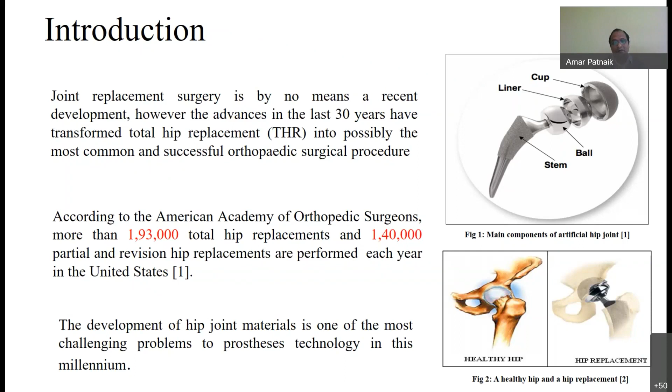So we'll see how it works, and what exactly the biomaterials are and where it started. It is not specific to some area like mechanical or medical science only. It's all sciences, arts, commerce - everything is under these groups only.

So we are saying that in 1987 there were a few pioneers, Williams, who first developed medical devices through this. It was not developed effectively previously. It was developed, but effective results came during that period. Because of that, we can say the effective period of analysis of biomaterial is from 1987.

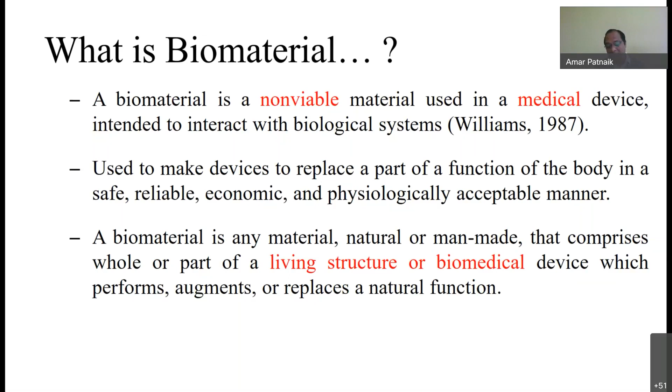And the main problem with biomaterials is material failures. Prior to that, some natural and man-made materials were used as artificial replacement materials in the human body, or even in animals.

So for any biomaterial we use, we need to study a few things first. Otherwise we can't use it directly in the body or in direct applications, whether human or animal. So prosthetic replacement is feasible in both humans as well as animals. Research is going on for both.

In India also, both are being done. It's not only human being replacement, it's also replacement in animals. Sometimes we are doing animals depending upon how our cultures affect this - we are least bothered about animals, so there is less replacement there, but for human beings, replacement is a major growing area. Near my MNIT, there is a big production house, a private laboratory, and they are developing biomaterials through polymers only.

So however the biomaterial is developed, we need to study its compatibility first, whether it is biocompatible or not. That is the first analysis.

So while studying biomaterials, I will show you how people study it by putting the developed material into an animal's body and testing the compatibility, and you can study both through equipment also. But biocompatibility generally depends on the type of material and the type of stresses also.

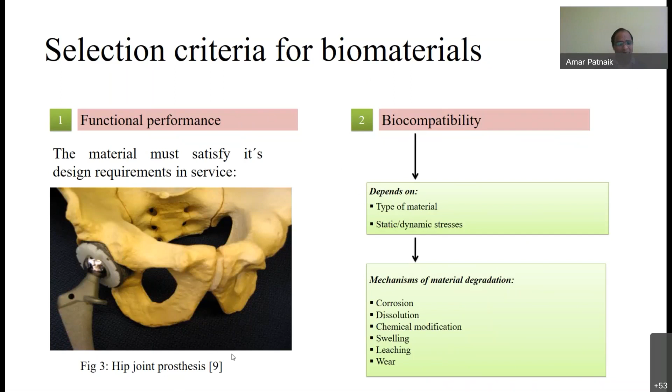The rest we have not covered, it's not our area of research. So the prosthetic material, the developed artificial part - any part can be replaced, and people are studying this, but our part is only the liner part. So exactly the area of research going on in the present day is all this.

Depending upon the situation, we use the materials - either metals, or metals and alloys, or ceramics and also polymers. So in metals, the use is moderate, because its application is neither weaker nor stronger material - it is in between polymer and ceramics.

So the basic biometals being used are cobalt-based alloys as the basic one, and titanium and its alloys. Stainless steel is the oldest fashion that people are using. As far as ceramics, alumina, zirconia, bioglass and glass ceramics, calcium phosphate ceramics - it is a group. And as far as polymer is concerned, UHMWPE, ultra high molecular weight polyethylene, is the one measured for use.

Most medical applications use this material - UHMWPE - as a membrane material also, sometimes as a cork material also, sometimes as a liner material also.

The behavior is like metals only. So as far as application point of view, it is good and a corrosion resisting material.

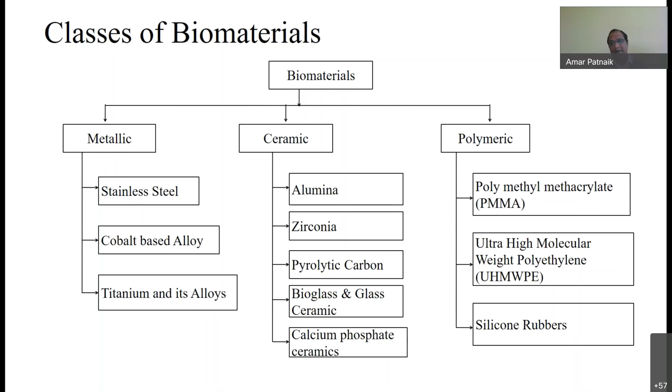Before going to our results, some basic things we want to refresh. So the people working on this are material scientists, biomedical specialists, pathologists, and clinicians, all working on this particular area of biomaterials.

One example I want to mention is AIIMS Delhi. They proved that whatever biometals we are using, it has side effects. This article is available online on the AIIMS website.

So it means there are still some defects, or you can say casting defects, or side effects. A major side effect is cancer. That is the major side effect.

Other side effects we can measure and manage. But cancer has one of the highest degrees of severity, even more than COVID disease.

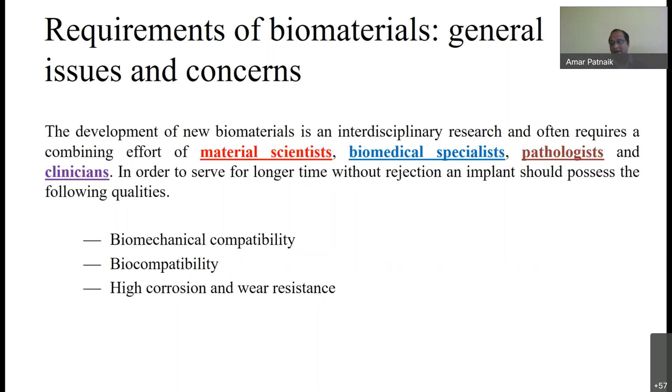Research started around 1938, and the first biomaterial used was M on M, that is metal on metal, a stainless steel cup with a head. As I said, there is a cup, a liner, and a ball. All three are important.

If any component fails, it is the biggest problem, because a second replacement is tough and tedious for the patient also. So it had some failures, and the cup was fixed using screws, and some heads were used.

We will discuss the demerits again. In 1958, another group discussed metals and polymers, because for all the parts, there's no need to go with metals only. They felt that if one or two parts used a polymer, the weight could be reduced and maybe have some good properties too. It's not a bad thing. Because of that, this partially replaced metals, and they used a polymer.

It is PTFE, that is a polymer. It is very good. And what they observed is that there is rapid wear of the PTFE.

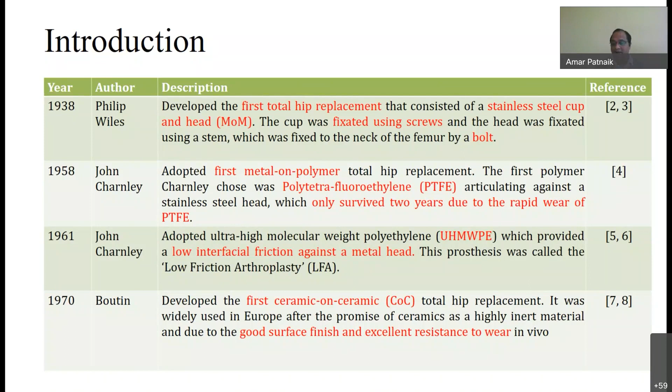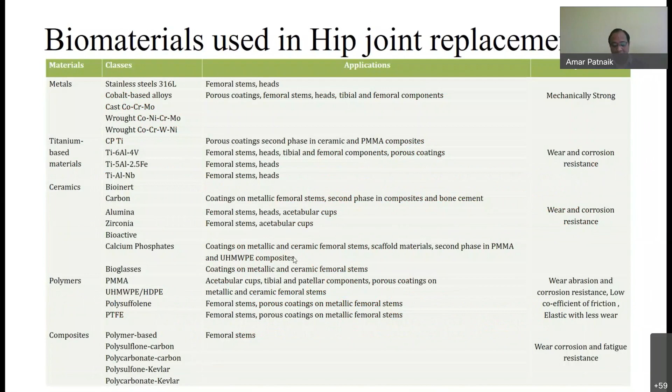So for hip joint replacement, there are a huge number of combinations of materials. I don't want to read all these things, and if possible, I can share the slides, so you people can see them also.

For biomaterials, the main measure of failure is aseptic loosening. Even sportsmen who jump or dance can experience a slip of disc or hip, and these materials are involved. The failure rate measure is around 64%, and the material can have side effects such as infection. Dislocation is also a part of this study.

So the area of research is big, and the area of defect is also big. It's not very small, it's very broad. With 64% failure, you can see how big this problem really is.

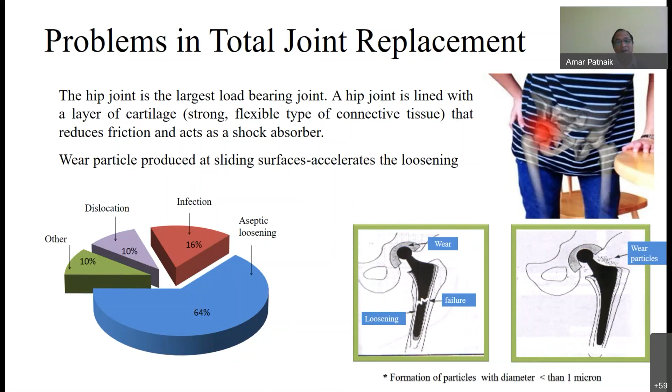People have used different groups of ceramic materials, different series, and every series has some merits and demerits. If I want to use the alumina zirconia series, you can say impact resistance is good, somewhere wear resistance is good, somewhere corrosion resistance is good. You can't get all these properties in a single material. That's why, as a material, it is versatile in character only. We can't get everything in one material.

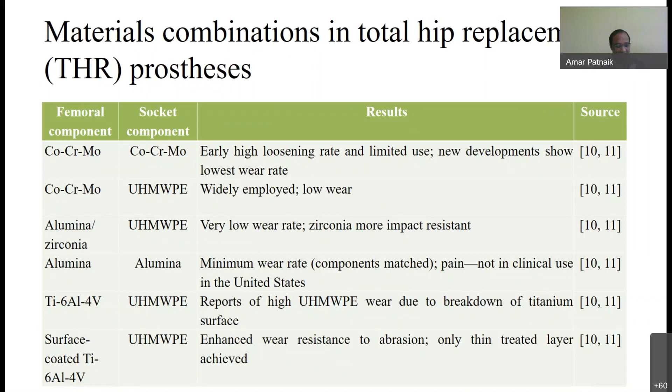If you get all good properties in the same material, then there is no need for further study. That's why every element of the materials has a different role - maybe someone is very good in resistance, someone very good in corrosion resistance, someone very good in wear resistance. So there are different applications for different materials.

So regarding the generations of biomaterials: 1974 was the first generation. Here they calculated less than 100% theoretical density, and what they observed was that the reduction in strength contributed to the earlier failures.

The second generation, in 1992, improved the materials with a finer grain size, because particle size and surface finish directly affect the strength of a particular material. So they shifted from macro to micro, and present day almost all biomaterials researchers are working on nanomaterials only. The effect of size and surface finish is also a major role.

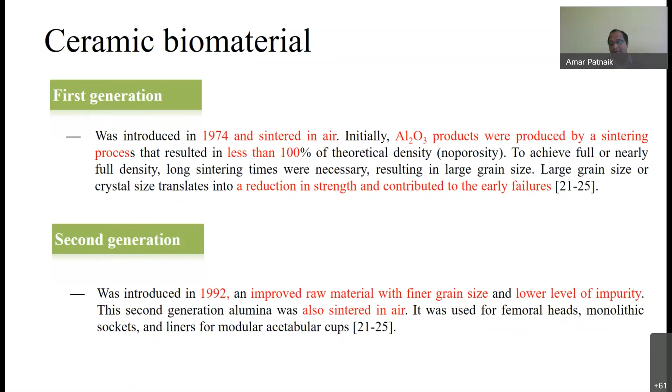That is the second generation. What they observed was that raw material with a finer grain size is required, along with a lower level of impurities - these two things they identified and used.

In the third generation, in 1995, they slightly changed the fabrication technique - using hot isostatic pressing after sintering to reduce grain size. For fabrication techniques, you can go for stir casting, powder metallurgy principles, centrifugal casting, or compression molding. Similarly, hot pressing is another technique, where at controlled pressure and temperature you prepare a specific material. This is one group of research.

That's the generational change - first, second, third. Then in the fourth generation, they identified an alumina matrix composite with 82% alumina, 17% zirconium oxide, 0.3% chromium oxide, and 0.6% strontium oxide. They observed that properties improved compared to the first three generations - hardness improved and wear resistance also improved. By using chromium oxide and strontium, there was enhanced toughness as well as fracture energy. That is the fourth generation's identification.

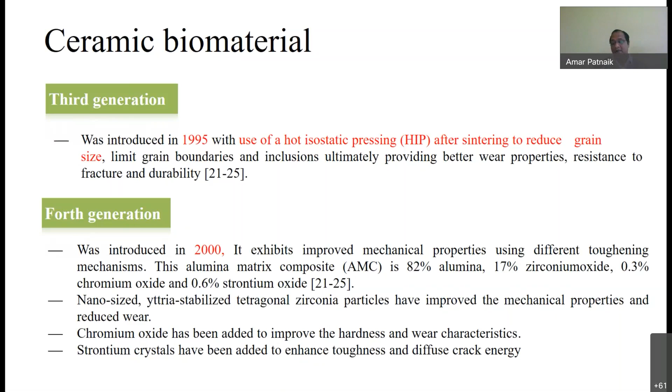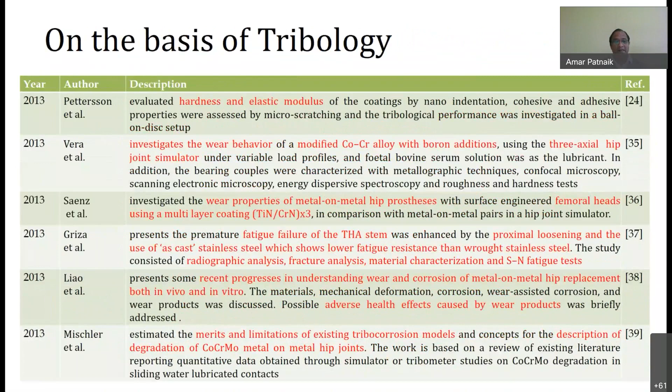So these are the generations. Based on that, people have developed the following materials, and identified different groups of materials. From these three series we have prepared nearly 16 to 17 series. Nearly five students have already completed work on hip prosthetics, and four students have completed work on dental materials.

So we have a huge number of series. This is one of the series, and there are three series we have prepared. The first series is the basic one people have used, that is cobalt, chromium, and molybdenum, with some weight percentages changed as per literature. The second series, we observed that we want to include some nickel. The third series, along with nickel and molybdenum, we have used tungsten also. Then finally, we observed which series gives better results.

So almost all the studies we have observed and studied. So only one series we will discuss.

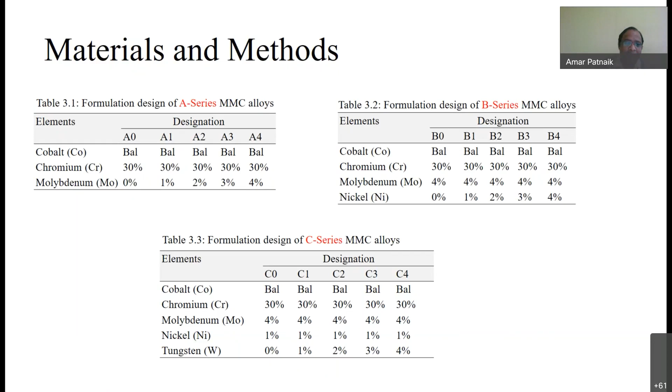This is our biomaterials part, as we have casted using centrifugal casting machines, and this is the grinding and polishing machines. This is the micro hardness machine, and we have scanning electron microscope, XRD, and FESEM. Then pin on disk at high temperature, it is a lab testing equipment at our laboratory. Atomic force microscope is also in our institute, and we also have a corrosion analyzer. Tissue processing we have studied in a different laboratory in MNIT only. So these are the equipments we have used in our work.

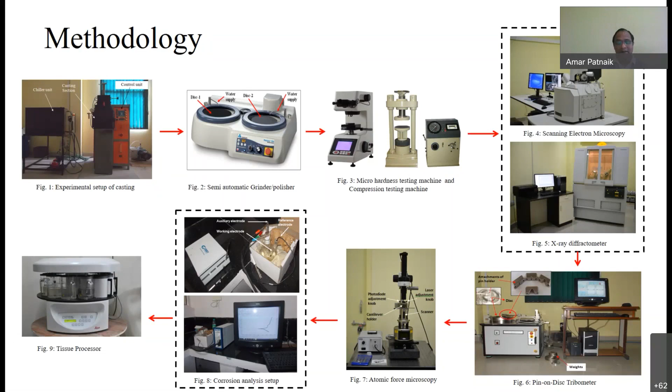So one of the series I want to discuss is, as far as biomaterial is concerned, I want you to think that I want to use my prosthetic material in a particular application. So I need to think about at what velocity that particular person wants to travel, and what is the load of that particular replaced person. So these are the basic boundary conditions. You can go with the load and velocity, distance, as well as the content of the materials.

These four things we have taken into consideration and studied. So load up to 25 newtons, and sliding velocities we have taken from 0.26 to 1.30, and the sliding distance from 500 to 2000 meters.

And after that, you can extrapolate. It's not a big thing - only through machine learning technique, or you can go through GA or through artificial neural network, we can extend that. We can change the data, and we don't necessarily need to do everything through experimental methods only. Some soft computing also can analyze the things very well.

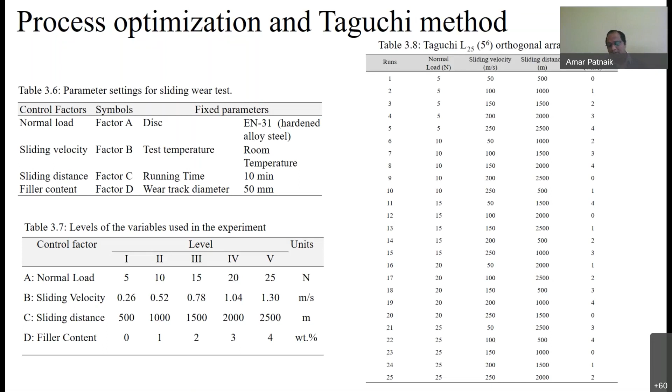So these are a few basic studies we have observed, through XRD as well as its EDX analysis also we have observed. And here the cobalt chromium materials, and molybdenum - this is the series cobalt, chromium, and molybdenum. Molybdenum is a filler material, just 4% we have added, and the rest is all base material, that is cobalt and chromium. Through XRD, what we observed is that there are 5 series of materials present.

So in XRD, we have observed some oxides also, formation of oxides is there. So the formation of oxides - it also indirectly affects the failure of your materials, the oxides. That is also required, meaning to identify whether during casting any oxides are formed or not.

The reason is that if oxides are there, then obviously there is some type of cracks or pores or voids we will observe once it starts working, because a few of the cracks or voids are internal only. We can't see them with our naked eye, even microstructure also we can't see it. But it is invisible like structures are there.

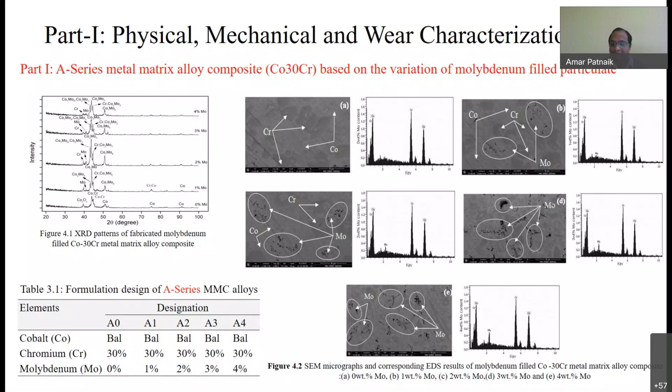Simultaneously, through the scanning electron microscope, we have observed the formation and availability of cobalt, chromium, and molybdenum. Through EDX, which is another parallel analysis of microstructures, we can verify what we observed through microstructures. Since I used X, Y, Z as three materials, we check whether all three are available, and whether they are in the same form as the virgin material used - cobalt, chromium, molybdenum, or something else. That we observe through EDX analysis. This shows the different micrographs as well as their EDX analysis, which is one part of the analysis.

For compressive strength, if we use this material for dental applications or prosthetic hip applications, compression load is the relevant measure - nobody goes for tensile testing. It may be compressive, or it may be a sudden impact test, or it may be a fracture test. These three mechanical tests are generally what people do.

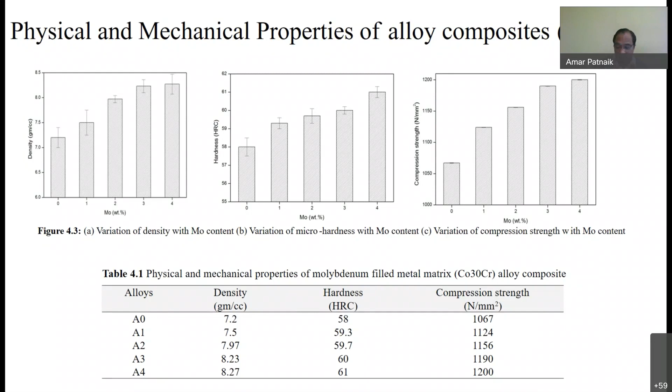I didn't want to show you the last result first, because we should know first what exactly the failure is. Then, at the next level, if we do biocompatibility bio study, we can proceed further. Initially we studied with a casting technique, then with some other spark plasma sintering technique. There we see nearly 0% formation of oxides, except in a few cases.

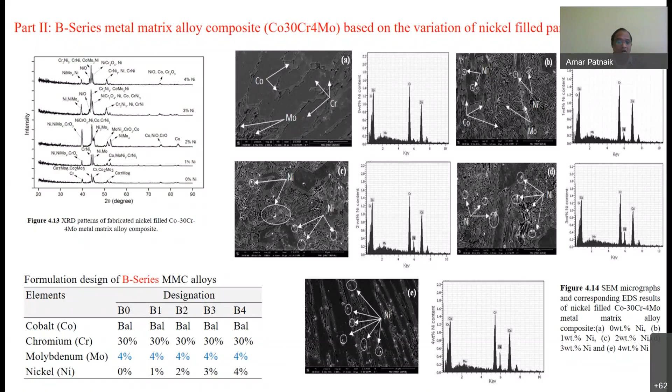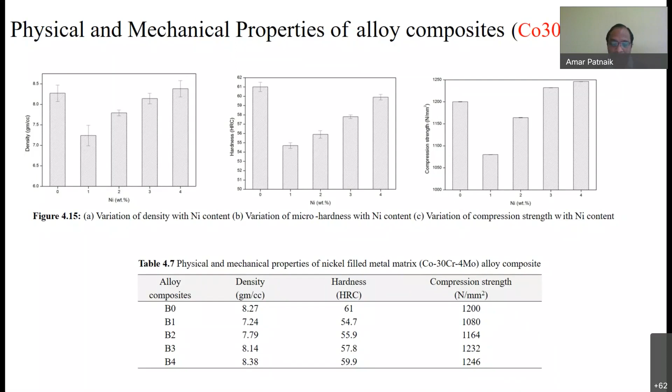If cobalt is there, what should be the color? If nickel is there, what should be the color? If molybdenum is there, what should be the color? If tungsten is there, what should be the color? We should learn this through different books and papers so we can easily identify exactly what materials are available in our microstructure, be it A, B, C, or D. Let us go with C.

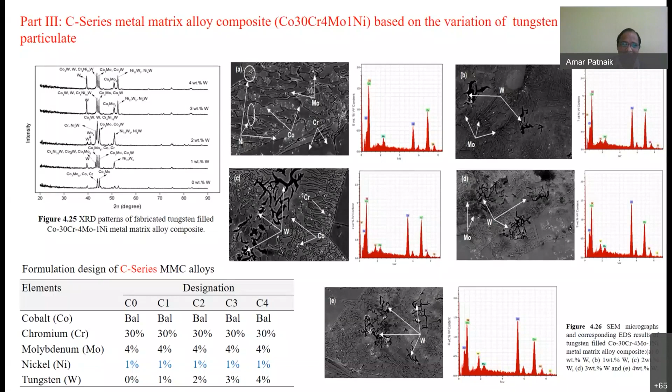We have cobalt there, we have chromium there, and all we can see it. The rest, a few things we cannot see - it's not possible with the microstructure alone. So for that we are doing XRD and EDX. Through EDX we have also observed that all are there - cobalt, chromium, nickel, molybdenum, tungsten, everything is there. So these are the analyses, covering physical and mechanical properties.

The main focus is the wear analysis of our part. So we have studied both dry and wet conditions.

Dry conditions we are not using, because if it is an acetabular liner, or a cup, or a cone - generally in the cup and cone part, there is one type of liquid present. It has different applications for the role of liquid. It will work as a lubricant first of all, and it also maintains temperature. That type of liquid, by God's grace, maintains the temperature because once surfaces rub against each other, you need to maintain temperature, otherwise the metal will fail.

So it is one type of artificial liquid - we have used artificial synovial liquid, and we have seen that for different loading conditions, with change in velocity and change in load, we have observed results in both dry and wet conditions.

Simultaneously, friction is also a major issue. If more friction is there, definitely there is a failure - 100% there is a failure. So we also need to study how to reduce that friction.

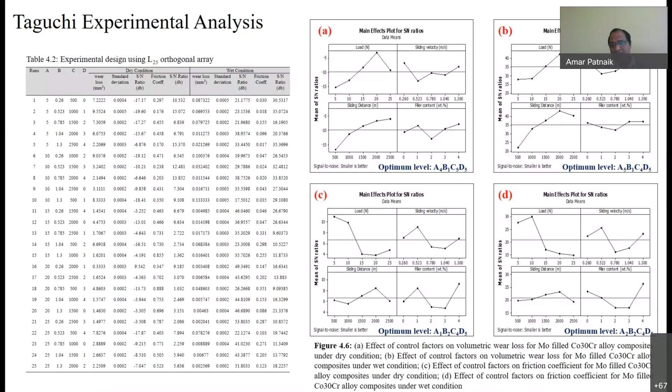But we have studied both dry and wet, because not necessarily will the material we have developed go only for prosthetic applications - we can use it for some other applications also. It is biocompatible, it is a biomaterial, but that doesn't mean we can only use it for bio applications; we can use it for others too. Cobalt, chromium, molybdenum, vanadium, or tungsten, or titanium are used in other applications also because they have good properties. Because of this reason, we have used both dry and wet conditions, so that we can find new applications using the same material.

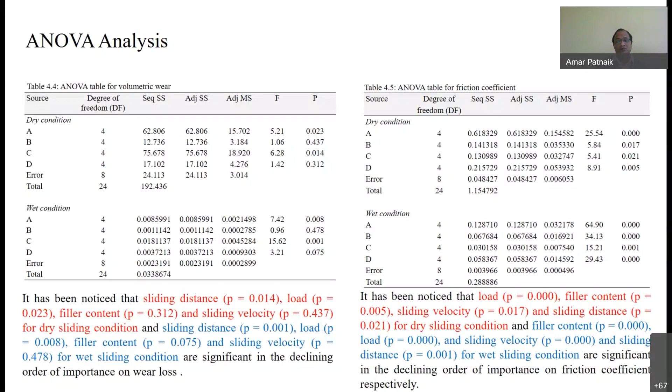Similarly, we have studied some statistics - pure statistics. Here we calculated the percentage contributions of individual factors, and what we observed is that specifically the distance and the velocity show significant contributions. These two comparisons we observed through statistical analysis only.

These are the wear mechanisms through which we can observe these type of terminologies. Through that we can further predict how we can change our materials. If there is removal of matrix material, it means the matrix is weak. If there is some type of micro crack, it means the filler we have added is not mechanically compatible, or bio-compatible.

Similarly, there is a failure of plowing type, a micro plowing. It means that the filler as well as the matrix bonding is not strong. So the interface zone always has a failure. Because of that reason, this type of analysis we have to study faster, so that we will come to know what we will do next.

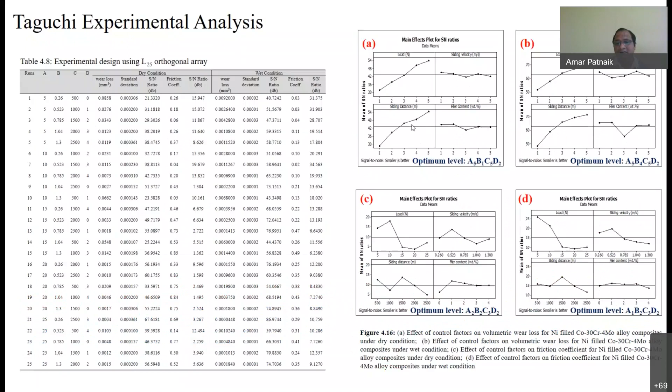Here what we have observed is that C, that is sliding distance, is more important. Sliding distance directly depends on the life of that material also.

How much a person is a sportsman, its sliding is different. If a person is a common man, if a person is a heavyweight person, or is a lightweight person.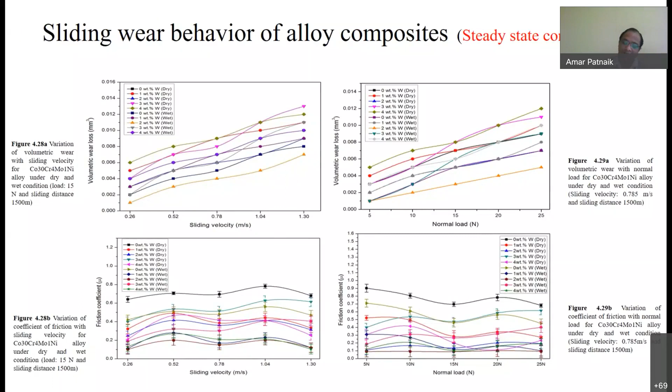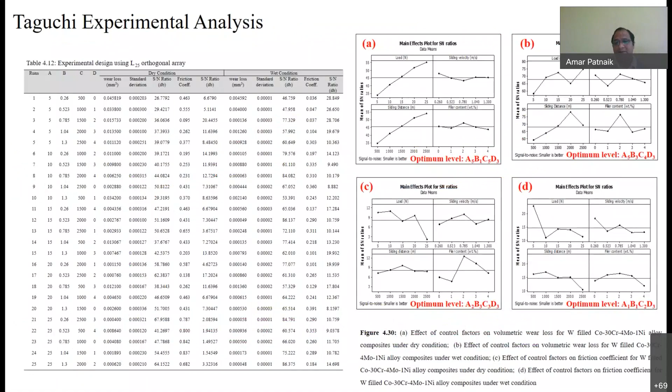Another series of materials, same surface morphology we have calculated, and I want to show you how other analysis is also important. As I've discussed, particularly for biomaterials, it purely depends upon the material's property: it depends upon corrosion resistance, wear resistance, the type of casting technique, the type of materials, and the size and shape of the material.

So you can see here the electrochemical test, and what exactly this study will help you with. Through the electrochemical test, since the corrosion current is generally directly proportional to the corrosion rate, if the corrosion current is lower, then the resistance against corrosion is better.

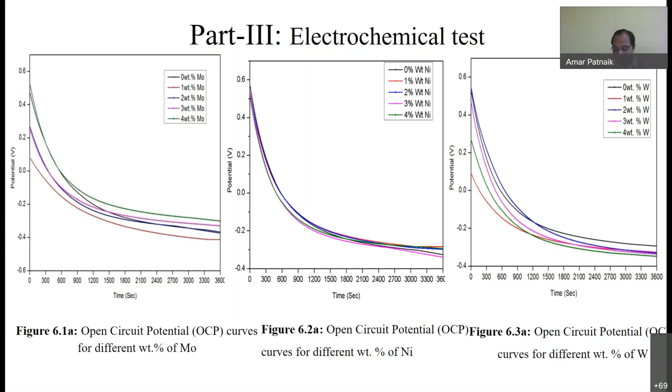So through electrochemical test, we can identify which material is more corrosive and which has less corrosion resistance. All these series are given at one time together. So through this, in tabular form, we can see the corrosion analysis results, and we can say exactly which material will be better suited to the human body, and which is less.

That is the most important thing, as by definition itself, corrosion of an implant implies that a certain amount of ion is released from the implant material into the body. That is the basic definition of corrosion.

So using these combinations, specifically the corrosion rate is high for 0 wt.% of Mo. In the second case, the corrosion rate is for 0 wt.% of nickel, or in the third case, it's 4 wt.% of tungsten, with 0.276 being the corrosion rate.

This is the basic analysis, because beyond that, we never use any paper on biomaterials. If you want to submit in a journal or file a further patent, all these things, we have filed a patent also through that. It is in the examination stage.

We already received the first examination report, FER, and hopefully it will be granted, because the material used is 100% proved to be biocompatible and suitable for a specific group of humans, specifically the 25 to 45 age group.

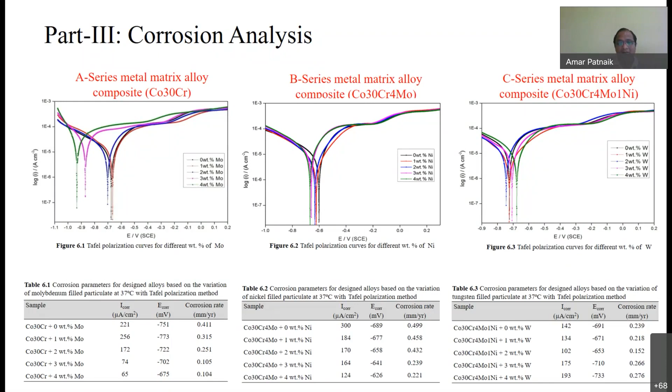So it may be a rabbit, or it may be a horse, people study various animals. It depends on what facility is available, so we need to understand what exactly they are doing.

Once you decide the final material and it gives better results in the biocompatibility study, you need to first study it inside the animal body, because we can't use it in a human body - it is illegal to do it in our laboratory.

So some authorized laboratories are there, specifically DRDO laboratories, they have these facilities, and we have studied there. They gave training to me first on a toy model, then we did it exactly the same way on a real one.

So we need to cut that one, just the upper skin, and put our material there, and then restitch it. After that, we took the initial weight of that material on that particular animal, and then every day we needed to take the weight of that.

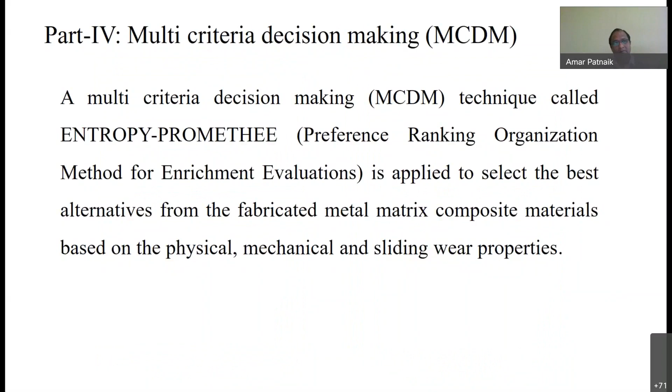Minor reaction is there, but there was no weight reduction of that material, because obviously if you put any artificial foreign material inside the body, definitely some type of swelling or minor reaction will take place, and it is painful also. We are unable to measure these things precisely. So what we did, we combined all these - biocompatibility, physical properties, mechanical properties, tribological properties - because there is a huge amount of data.

So it is also not easy, because in one case, maybe a certain percentage of material is good. In another case, some other weight percentage of material is good. In other cases, some other percentage. So overall, how can I say at the end that my X material is the best? For that, we studied the multi-criteria decision-making analysis, so that I can say that at the end, my X material is overall the best as compared to other series. Nearly 14 to 15 series are there.

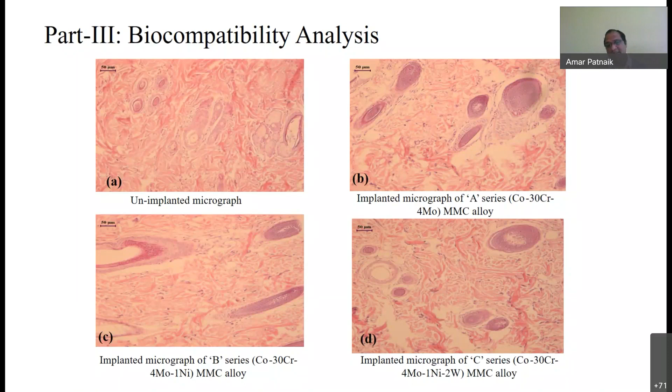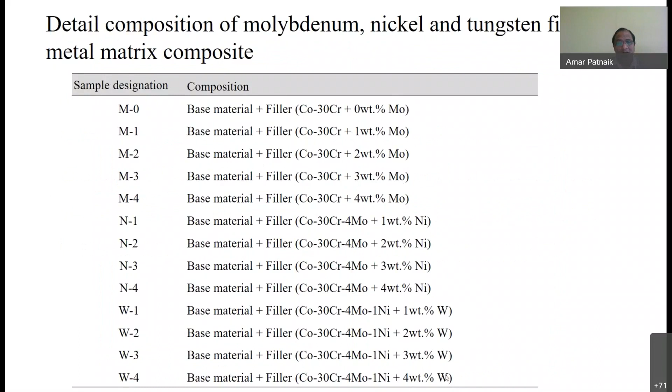So we studied base material filler with Mo 1 to 4, then base material with Mo and nickel 1 to 4, then base material with nickel, then 1 to 4 weight percentage of tungsten. These we have used, and we studied this through hybrid multi-criteria decision making analysis.

I will show you the results only. The criteria need to be decided - you want density lower, you want hardness higher, so accordingly you have to mention whether you want hardness higher the better or lower the better. Similarly, compressive strength higher the better. Similarly, wear resistance lower is obviously better. Coefficient of friction lower is better. That you have to decide.

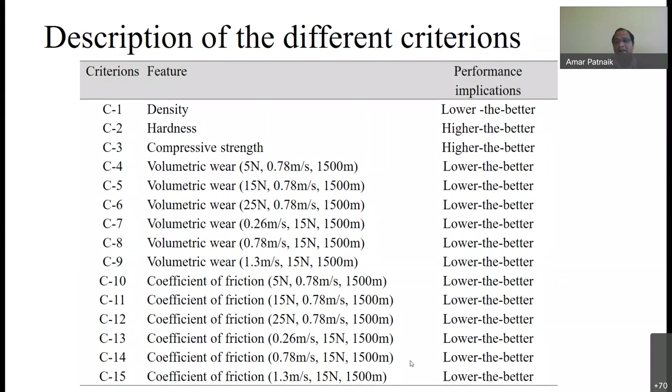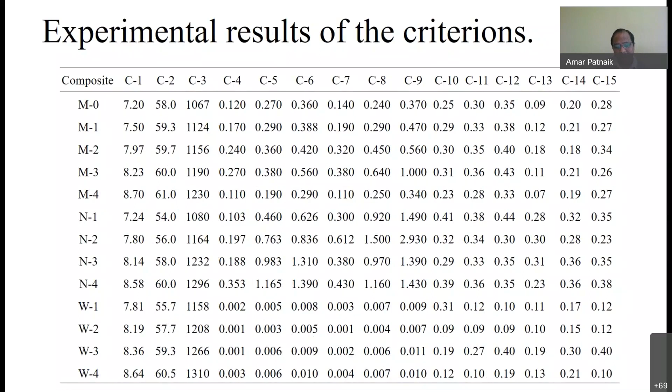Accordingly, this multi-criteria decision making will work. It is an easy thing. It is not that either TOPSIS technique, or AHP technique, or entropy technique is there. There are nearly 15 to 16 techniques, including fuzzy entropy and fuzzy TOPSIS. All techniques are there, and through that we can get the final weight criteria. You have to use it also.

But in GA, the weight criteria generally we give specific input more weightage. Like if a class has 20 students, someone will ask who is the best student. I can say X and Y is the best, or through seeing the results, X, Y, Z is the best — that's logical. Similarly, the weight percentage, the weight criteria, is decided based upon the results only. Through that we have calculated the weightage of individual factors or outputs.

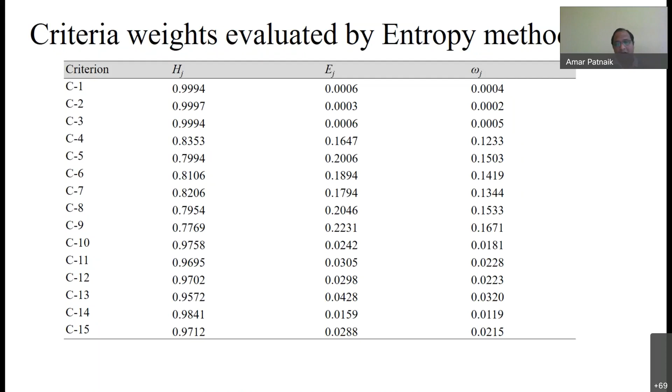So then we studied, and finally we observed that 2 weight% of W is the first one, the best one. That rank we did through the hybrid optimization techniques only. And rank 2 is again the same series, 4 weight percentage of W; and 1 weight% of W is the third rank. The W series gives better results compared to other series.

So I have shown you the literature also. Most people use cobalt, chromium, molybdenum, or nickel. But the W, cobalt, chromium, molybdenum, nickel series was not studied.

So we studied this one. As a researcher, you should always study the basic version first, along with your improved version, so that every time we can compare our modified version of the result with the basic, to say whether my modified version is better than the basic or not. Not necessarily every time — we won't always say our result is good only.

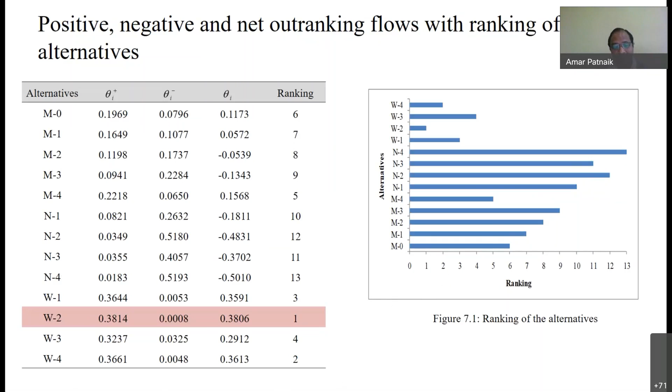I will show you another series, the dental material. We have a dental wear simulator, with different generations. Just within 5 minutes I will complete this part. I want to show you that it is feasible in our laboratory to study exactly how a human chews, and we can study that.

We have studied it in a tobacco medium, a deionized water medium, a food slurry medium, and in a cold drinks medium — that is artificial cold drinks. So almost all mediums we have studied, and through that we can also predict that the artificial materials developed will have a life of 5 years, 6 years, or 10 years — we can predict the life of those materials like this.

The chewing technique — there are 8 different chewing techniques, starting from night biting to sound, because sometimes while taking food with friends you will see and hear some type of sounds. So there are 8 optimization techniques for chewing, and technique number 8 is the best optimization technique for chewing of food.

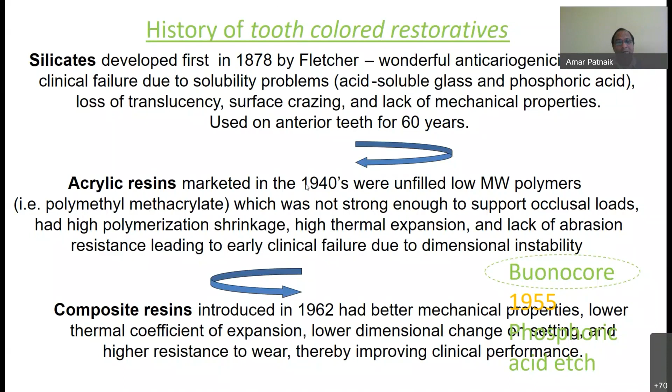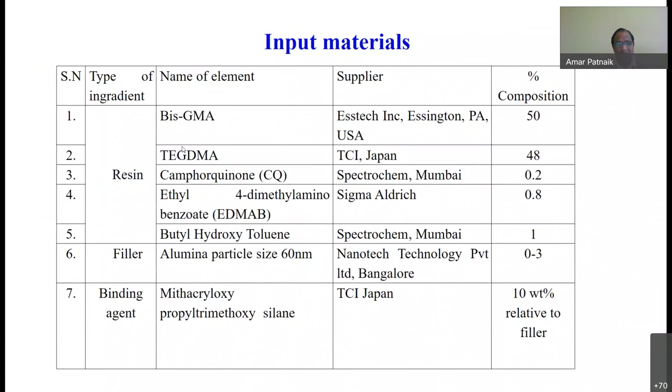There is one series of materials we have taken, that is BIS-GMA and TEGDMA. There are a lot of materials, and we have particularly taken nanomaterials also.

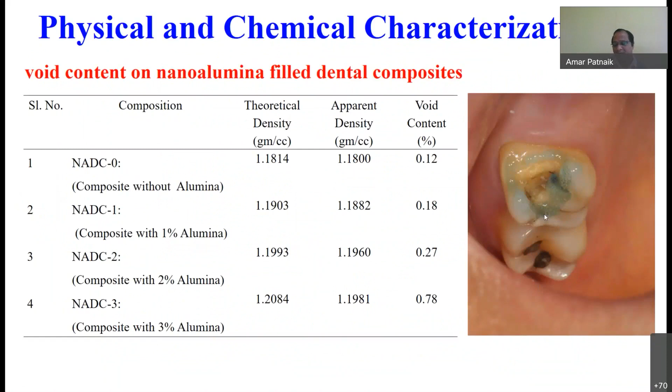The real problem is this one: what happens on the upper surface or the side. These are the general problems. It may be caused by continuous chewing of tobacco and such things, causing this type of damage. These are the different types of damage taking place inside the mouth.

Using this, we have studied the materials we have prepared, and if I put that material for artificial application, then after 10 days, 15 days, or maybe 365 days, we check whether that material is sinking or not, because it is a polymeric material and we regularly chew, giving some load to that tooth. So there is sinkage also. Sinkage may be due to load, or due to the food materials we are taking, which cause some type of reactions inside the body affecting the tooth material, causing sinkage.

We have also observed sinkage related to nano alumina content. If you take it, the polymerization shrinkage is minimum at 3 weight% of nano alumina. Whenever you go to the doctor, they never ask you whether you want 3 weight% nano alumina shrinkage or 2 weight%.

In general, nobody does this. If you go to the dentist, they will ask about the cost. If you use this one, it's 7,000. If you use this one, it's 3,000. If you want to use a diamond, it may be 5 lakhs. If you want gold, it may be 2 lakhs. Like this, they will just tell you the cost.

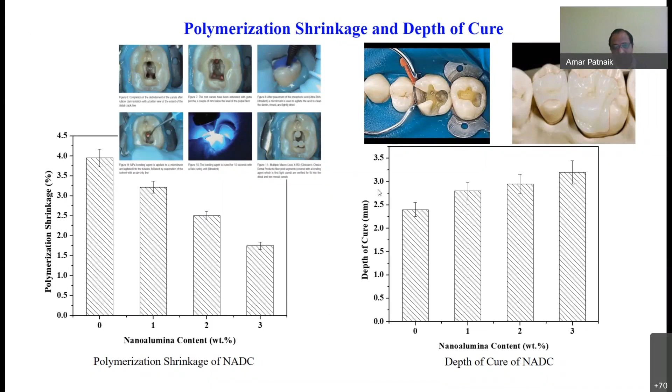This is the present research going on through the Master of Dental Surgery, MDS program. They are doing their masters program at that institute, and simultaneously doing research along with us.

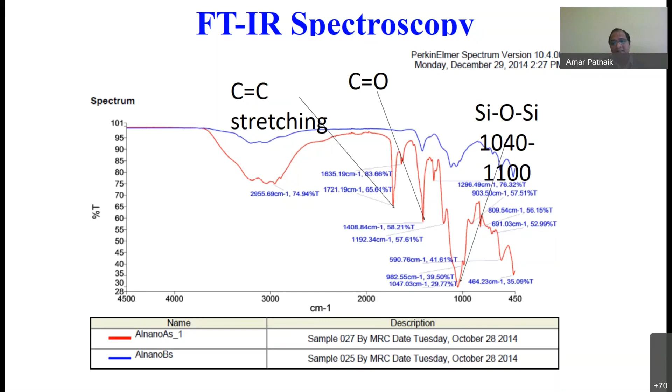That we can also predict through FTIR peaks. We can find out whether it is C=C or C=O through the peak, because FTIR has a specific range. Through that range only we can say that this type of bonding is taking place.

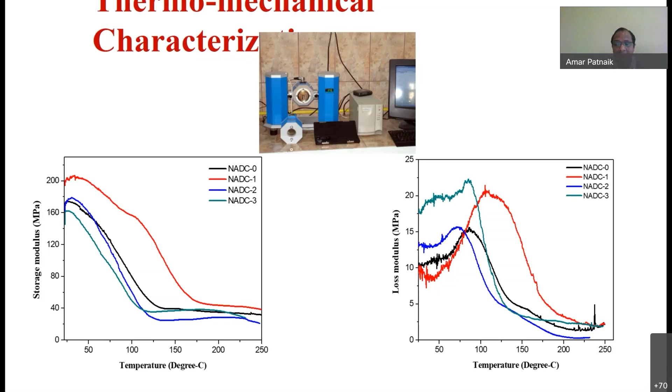And through loss modulus also we can calculate how the loss is maximum. So these are the patterns.

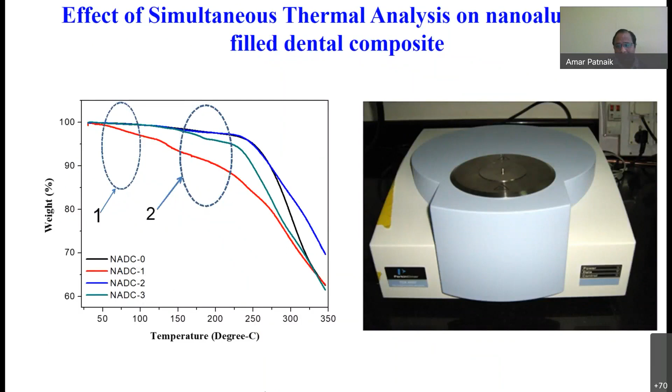So these are the different tests. Through that we can say whether our material is fit for specific use or not. We have also calculated compressive strength and hardness.

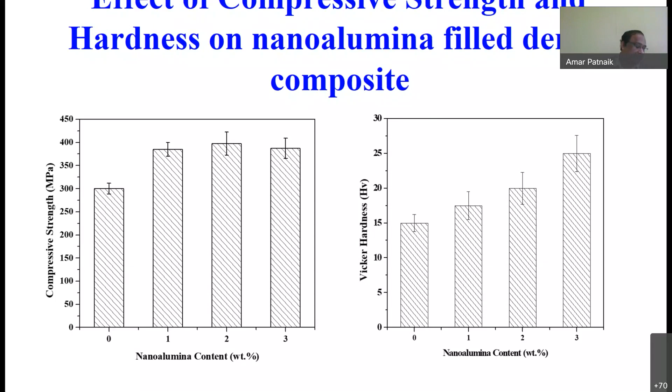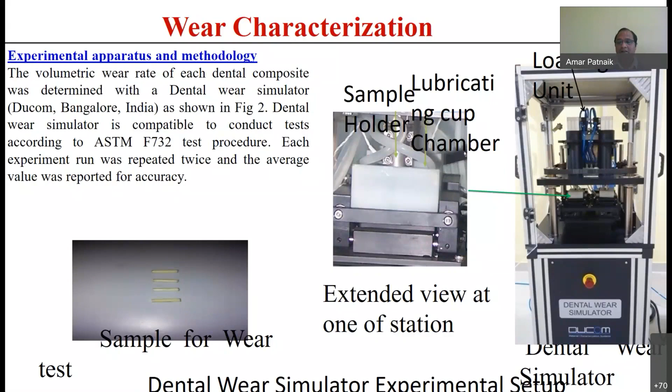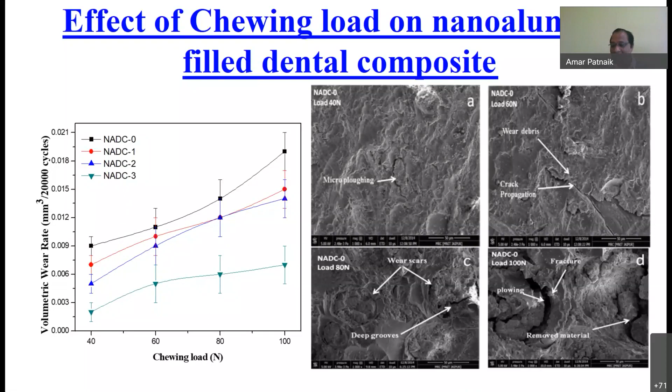It may be micro ploughing, or some other type, because those who are regularly chewing tobacco, their tooth materials - you will see that both the width and height will reduce. That is only because of the habit. So that is the main reason. Through that we can say these are the different types of failures taking place.

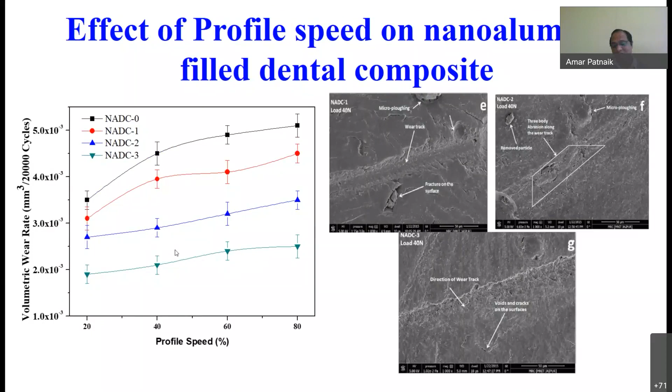So there are a huge number of results. This is just an overview of our work, so I am trying to show you so that you will know about it.

One of the observations is that at a 25-degree chamber temperature, there is a maximum loss, which means we should avoid that. Nobody will give you this idea. Not a single doctor will tell you that after replacement, after this prosthetic application, after doing the operation.

They only say that for 2-3 days, don't take hard foods, take some liquid foods instead, and after that it will be all right. But if you don't have any idea of that specific material, unknowingly we will do all these things, and it will fail one day.

Your expectation is that it will work for 7 years, but it will fail after 2 years also. And it is not that easy that every time you will remove it and put a new dental material. It is not that easy process. If you do multiple types of operations, then again there are side effects.

So the result is that beyond 35 degrees, there is no problem at all, so I have to avoid the 25-degree temperature. It's not that you will put a thermometer or some device, and anytime you take food, measure what temperature it is. It's not like that. Knowingly, you will understand by touch what 25-degree, 35-degree, or 100-degree temperature food feels like.

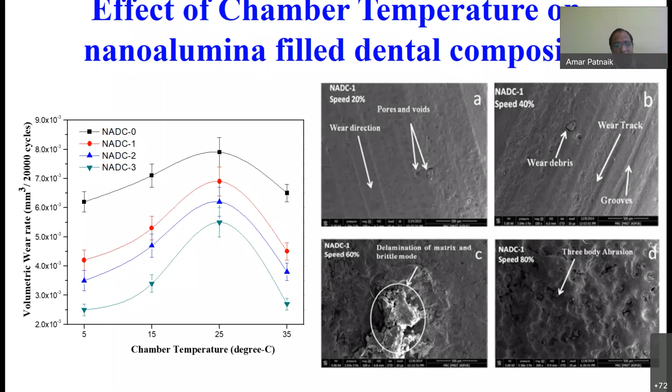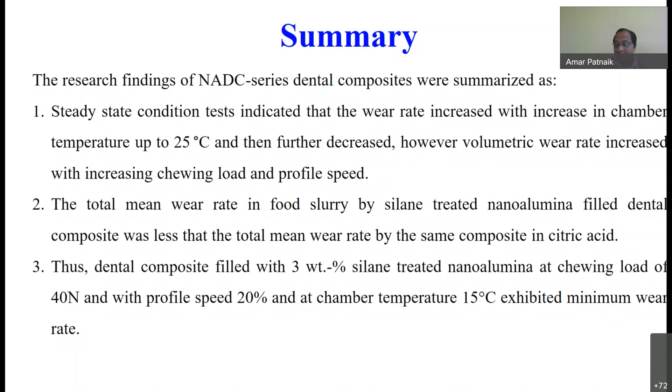So this is the overview: the NADC series, specifically 3-weight% silane treated nano alumina, at chewing load of 40 Newton with a profile speed of 20% and chamber temperature of 15 degrees, exhibited minimum wear rate or high wear resistance.

With this, I want to stop my presentation, and now it is over to you, sir. If you have any questions, you are most welcome to ask me.

Thank you sir, for an elaborative and exhaustive work on biomedical applications. So are you working only with metals or polymers also, sir? Polymer also, both I am working on. That's why one hip part I showed you metals, and the dental part I showed you polymer. But we are working on both metal and polymer.